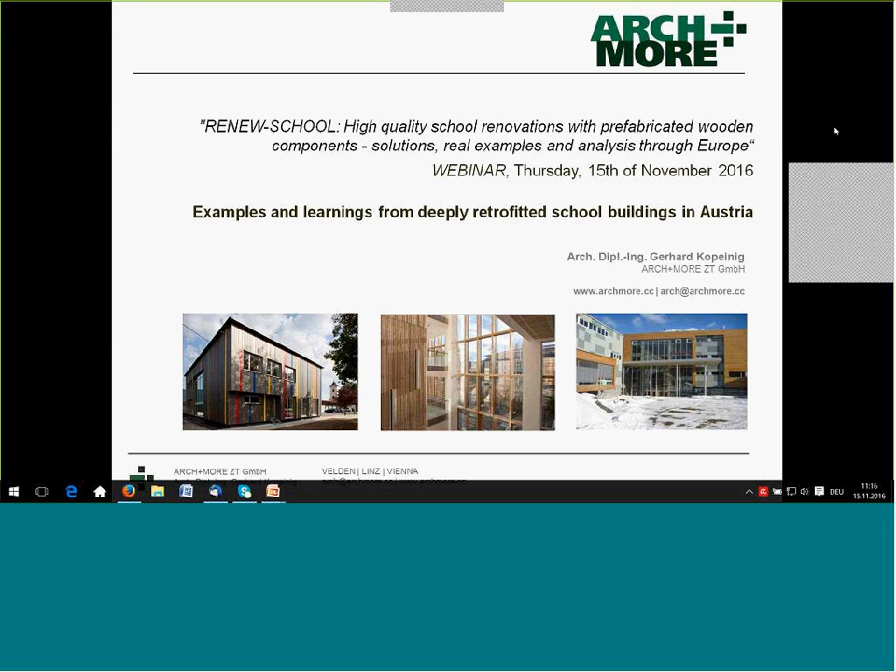I'm an architect. I'm doing retrofit buildings since more than 10 years. We started in 2003, 2004 with the first prefabricated elements in housing situations, and the first school building we did in 2008. We are not only an architecture office, we are also doing energy concepts. So overall thinking is for us more than important.

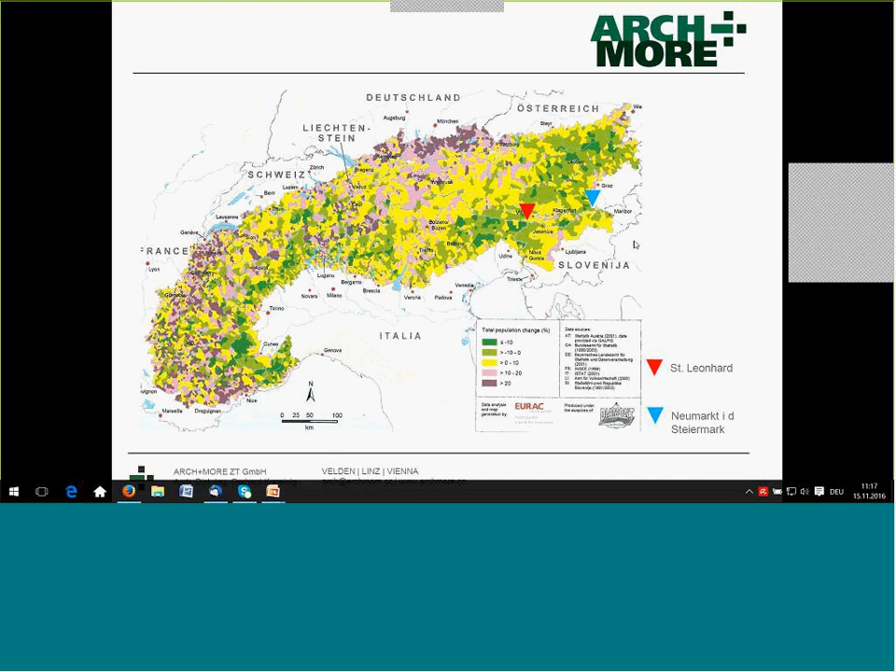You can see where we are situated. I would like to show you mainly two front runner projects, one in Neumarkt in Styria, one in St. Leonhard in Carinthia. You can see that we are in the Eastern Alps, southern Eastern Alps, on the border to Slovenia and Italy. You can see also the population and temperature situation.

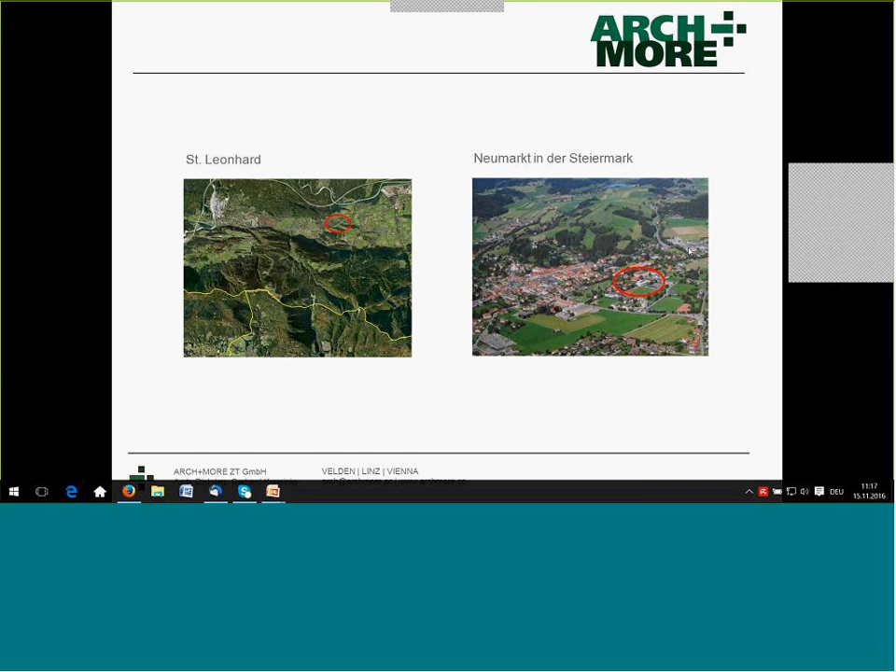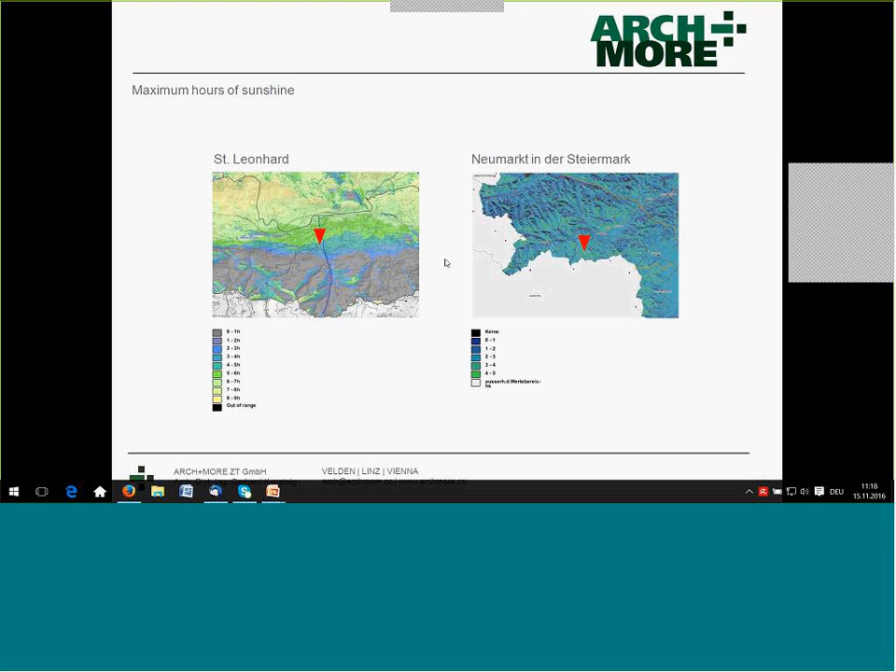You can see how the local situation is in Neumarkt and in St. Leonhard. These are very small villages. These are not very big cities. You can also see the sunlight, the maximum hours of sunlight in winter. In both situations, it's only 3 or 4 hours of possible sunlight in the winter situation. So we have a very cold climate.

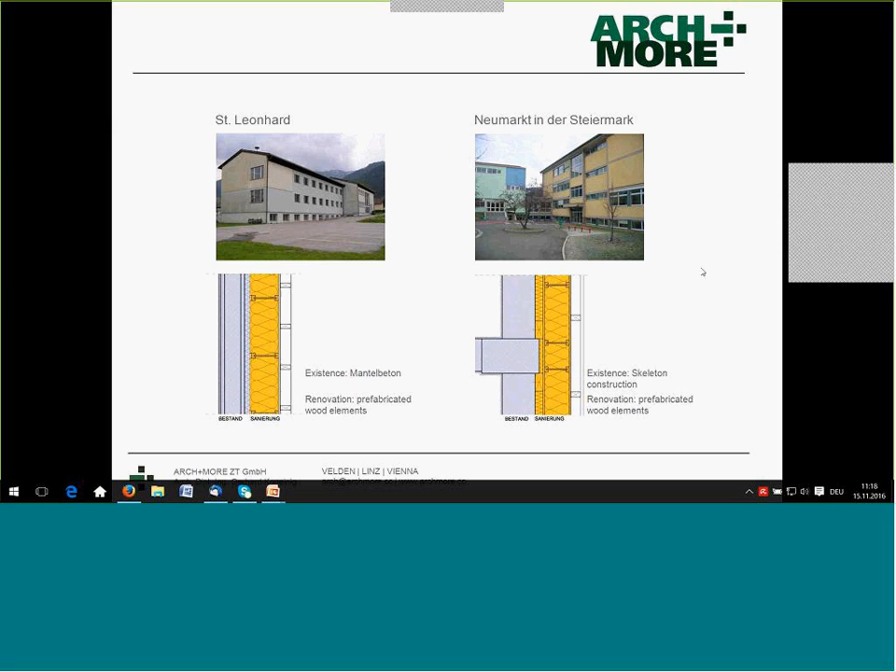So basically, I would like to compare the situation in Austria. We had in the late 1980s the first school renovations. As you can see on the left picture, there is 5 or 6 centimeters of EPS on the facade. That's where we started with renovation. And on the right hand side, you can see Neumarkt, a concrete structure filled up with bricks in the 1970s. Typical building stock in Austria.

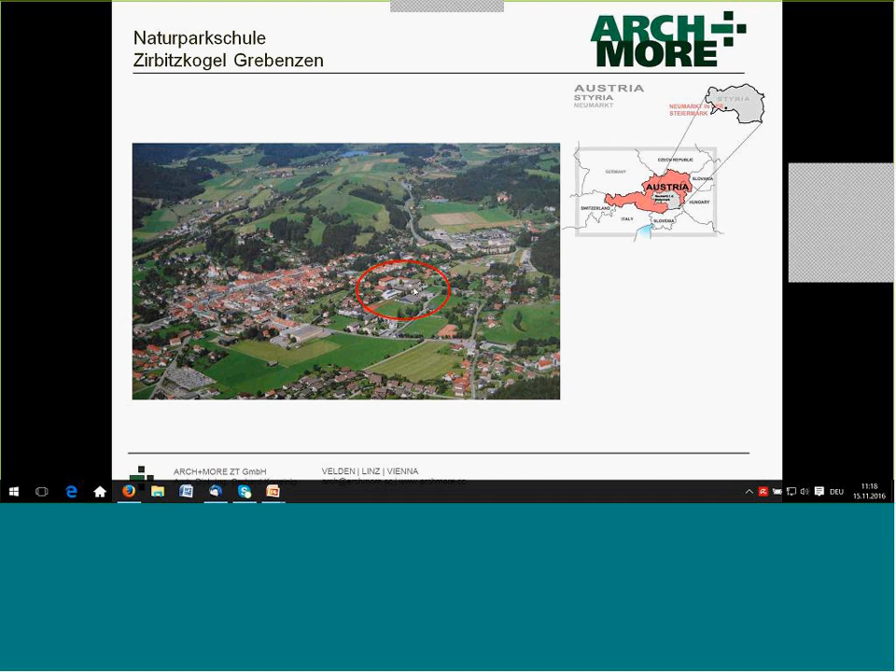First, we start with Neumarkt. As I said, it's in the countryside. Also here, the building stock consists of very different typologies. Basically, we are looking at the concrete structure filled up with bricks, because this is the point where we started with renewing and basically first analyzing.

What I want to mention first is, please, before you start with any concept, with any drawings, you have to analyze, you have to drill into the walls, you have to see what the structure is all about, especially these old roof structures. They are really to analyze in detail, and you have also to analyze the way of use of the school

building for the future, because, for example, in this case, the countryside is losing pupils, of course, so we have too many square meters, which we all have to heat up in the cold climate. So it's a big topic to reduce square meters in our school buildings. Of course, the local governments want to keep the square meters, don't want to reduce their building. The government wants to reduce.

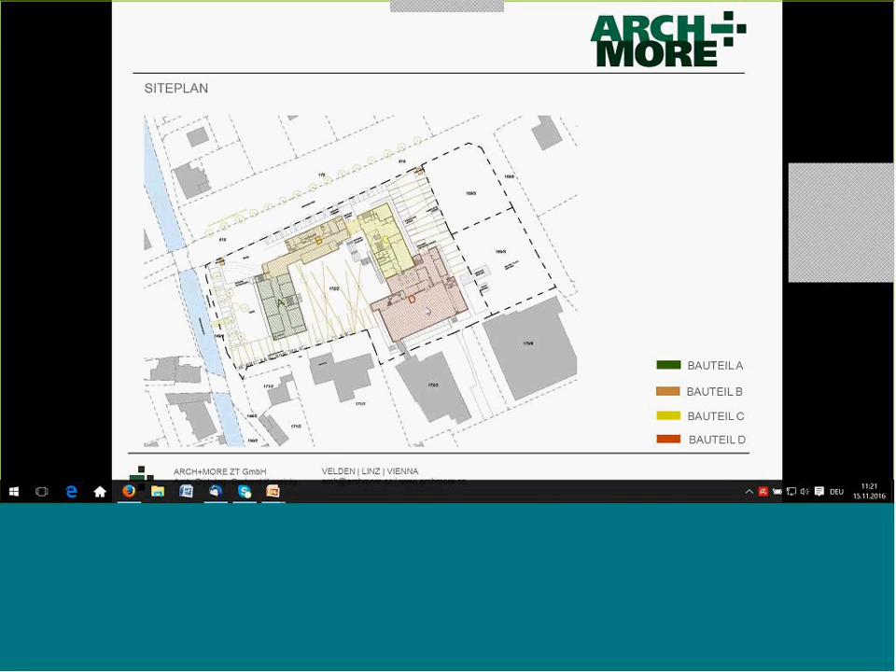Yes, so this is divided in 4 sectors. In this school, maybe we look at C and D, and this is what we renewed with wooden elements. Basically, whole sector C is renewed with wooden elements. Sector D is a sports hall. This is also a zero energy renovation, but in a conventional way.

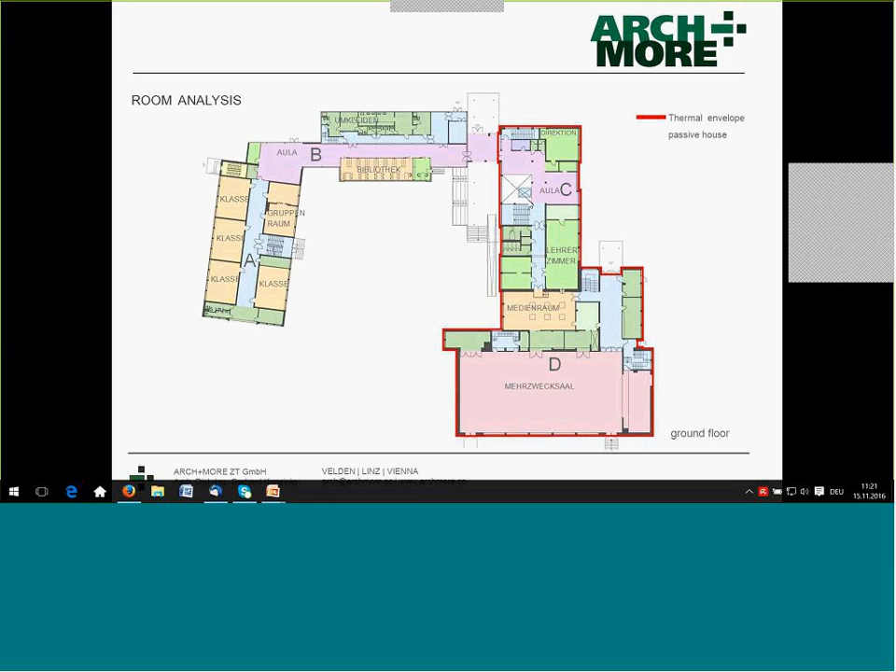As you can see, we got a new entrance. We got a new atrium in this building, and we got a new elevator for pedestrians to have a new space and a new way of coming into all levels. As you can see, one important thing is the detailing. The detailing before you start with building; you can see here the existing level of the building.

So only the construction we kept. You can see the yellow things are the existing points. The red line, the thin red line, is the airtight layer, the inside airtight layer, which is very important if you have a ventilation system, an HVAC system. And as you can see, there is the orange line. This is the very important line for the isolation, so that we don't have any thermal bridges in our detail.

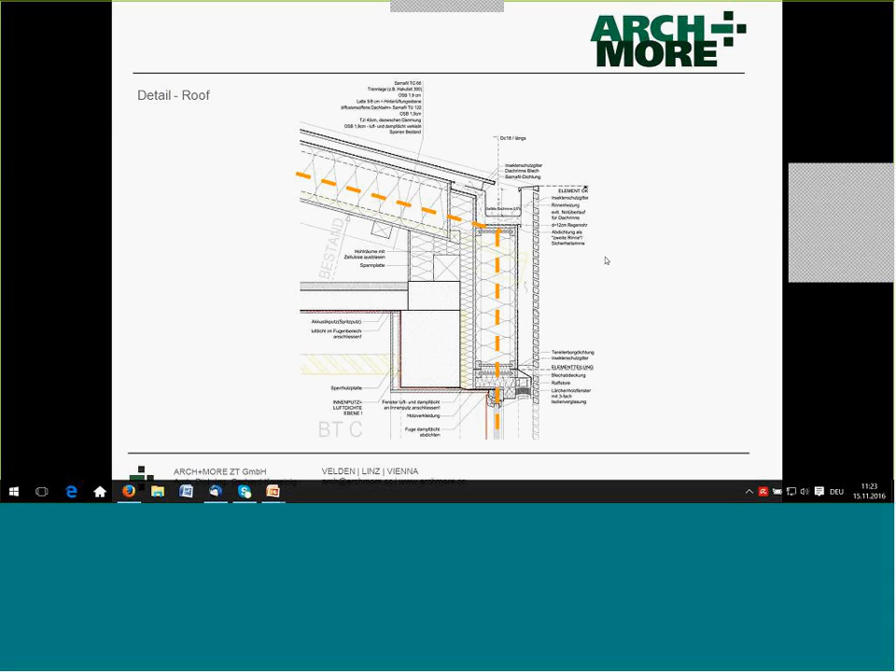And of course, we have an air ventilation on the outside, on the suspended construction. And of course, we would like to have very nice details as an architect. So also this is all in these system details, which is very important to draw before you start searching for a contractor or anything in case of construction.

So you can see our design, the existing building and the design. You can see this is a Western orientated open atrium with a glass wall. Here you can also see that we had on one hand a look on the daylight quality of the interior space. On the other hand, we have to make sure that we don't have overheating, because it's Western orientated.

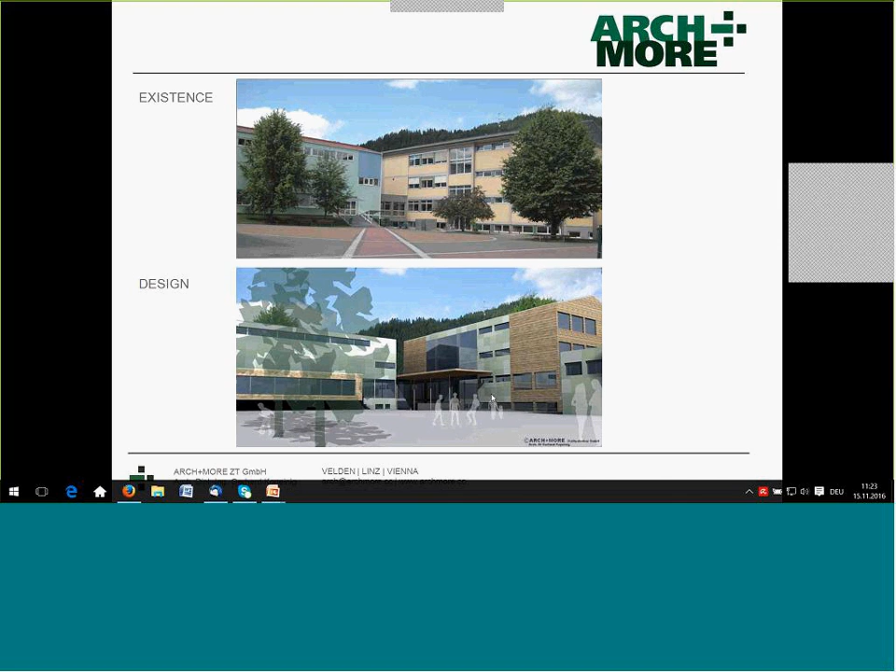Option 2, an outside sunscreen, of course, would be the best. We are always underneath the 26-degree line, but we have the problem also of maintaining and the investment costs, and not so much transparency as we have now.

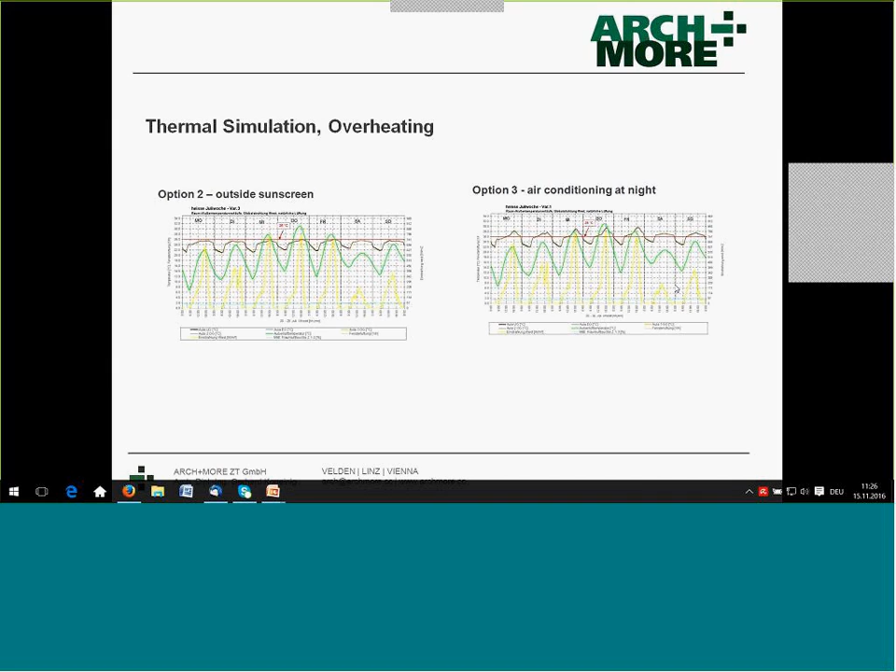Now, then we started with the construction. Actually, we did the construction in 2 summers. First summer we did the sporting hall and the connection area. Second year we did the classroom part of the school. So we had 2 times 10 weeks, and as Mark and Armin already said, we had also some preparation time in May and June. This helped us to have no container classes, which are also costs for the government.

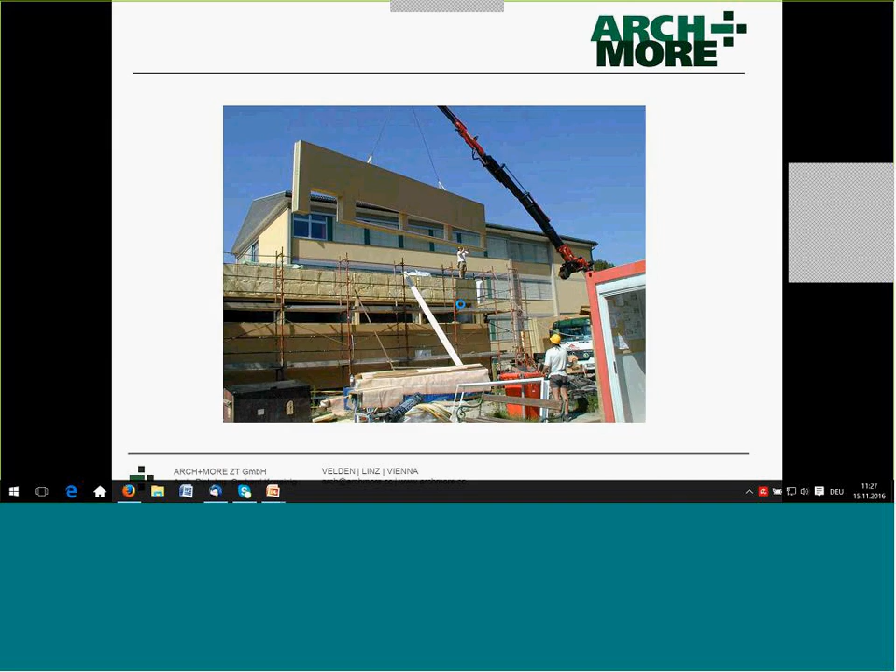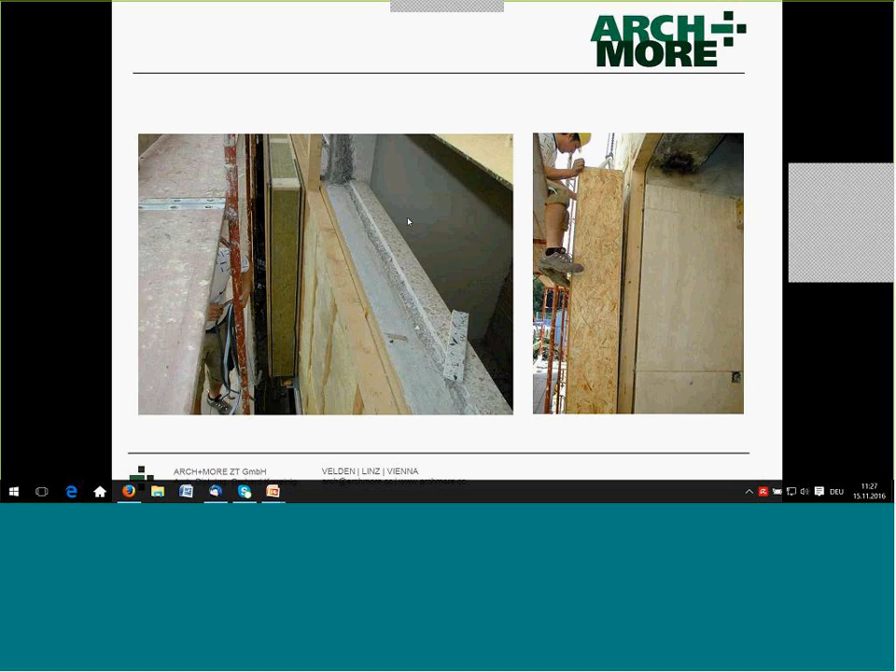Here you can see we have a pre-construction. We have the wooden elements, as he is sitting there bringing in these elements in position. The main thing is the connection of the new element of the OSB board to the existing plaster wall and the inside, because this gives you the airtightness. This is the main task if you work with this wooden element. You can see here on the right picture now how this work has to be done.

These joints are the most critical things apart from the electrical installation. For example, the sunshades, which is also a very critical part in case of airtightness. Here you can see the depth, how deep it is to the wooden windows.

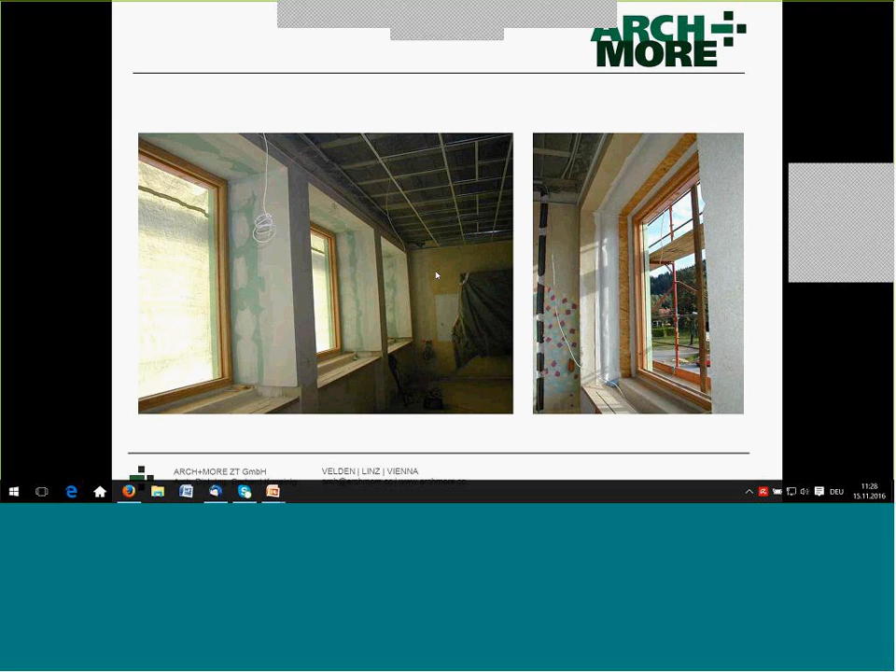We went for larch, which is very local wood there. We had this question before, the daylight, but we simulated this daylight situation, and the teachers are very happy now with having a very deep board for the pupils to bring their presents on top.

So it's very helpful. Here you can see the holes for the cellulose. We have blown in the cellulose on site where it was not possible because of the joints to do it in the workshop. Some parts always have to be done on site.

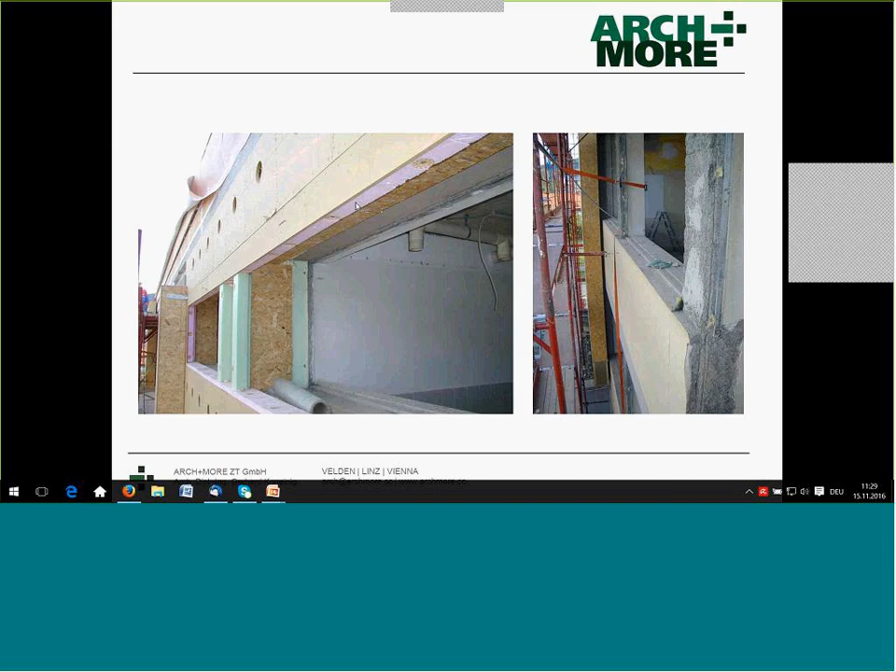Here you can see the element before we mounted it, and the worker next to it mounting it. Here you can see the steel plates, the consoles, which we needed for structural reasons. As mentioned before, the structural point in the construction is very tricky, especially in the existing situation. Therefore, you really have to analyze it perfectly and in detail with a good team.

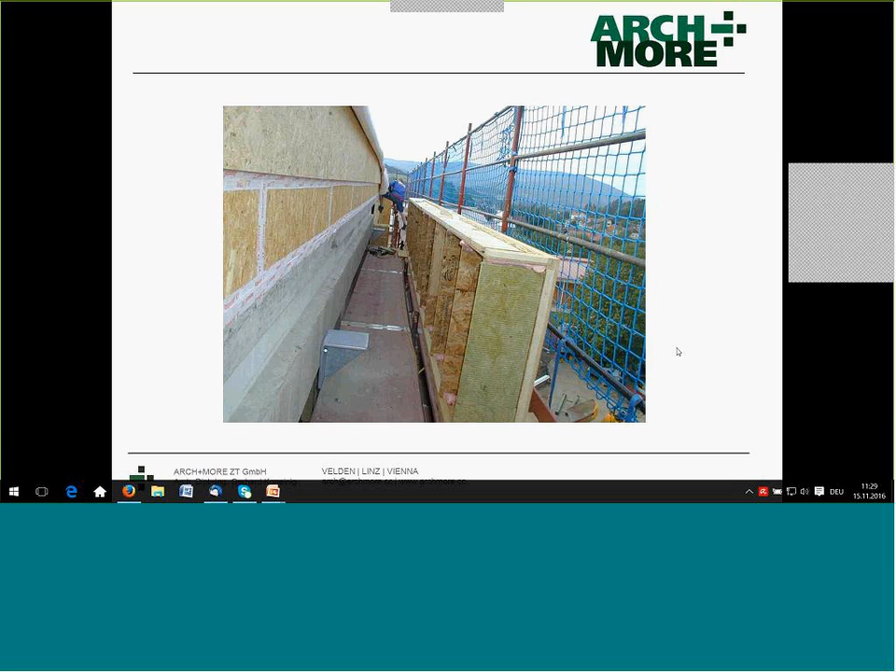Otherwise, it's not. You can see how it looks like on site when the elements are mounted, and you can see the holes where we have blown in all the cellulose.

Here you can see the wind paper. It's not like an airtight paper, because otherwise you have condensation in the construction. It has to be only windproof. This is the reason that the insulation becomes higher quality and has a higher effect on the facade.

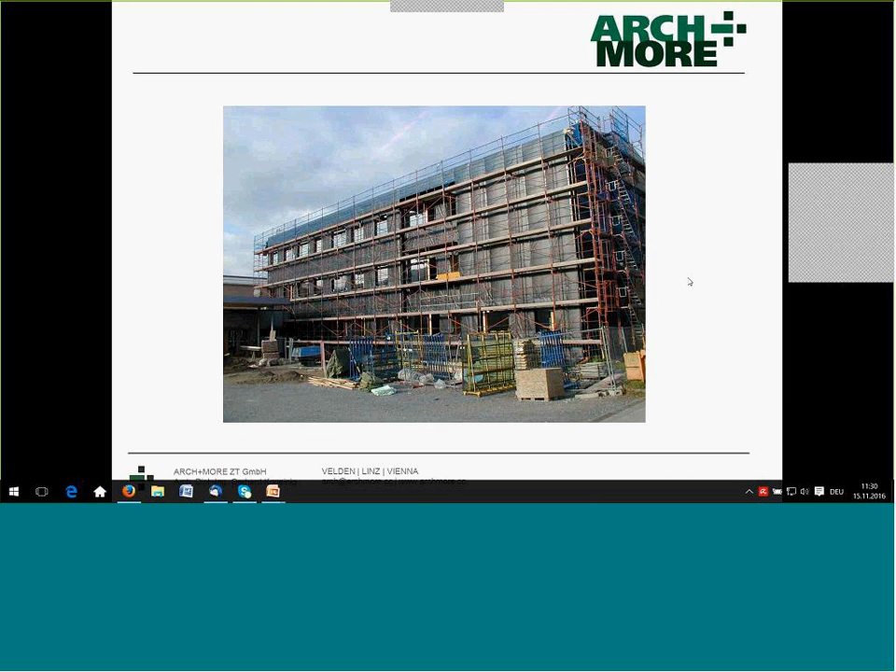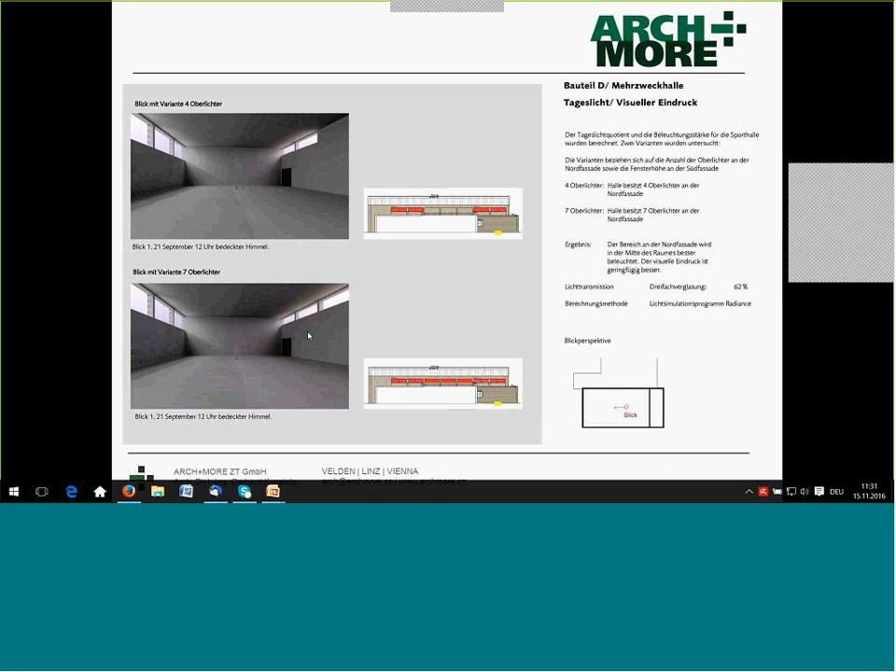So we had to halve the north side windows. We didn't want to do this without a daylight simulation, because we didn't want to have the argument afterwards that we have less daylight in the sporting hall. So we did it in very different versions, 4 or 7 versions of daylight simulation, to show the client how the situation will be after renovation, and it's perfect. So we decided to make the north side windows half the size.

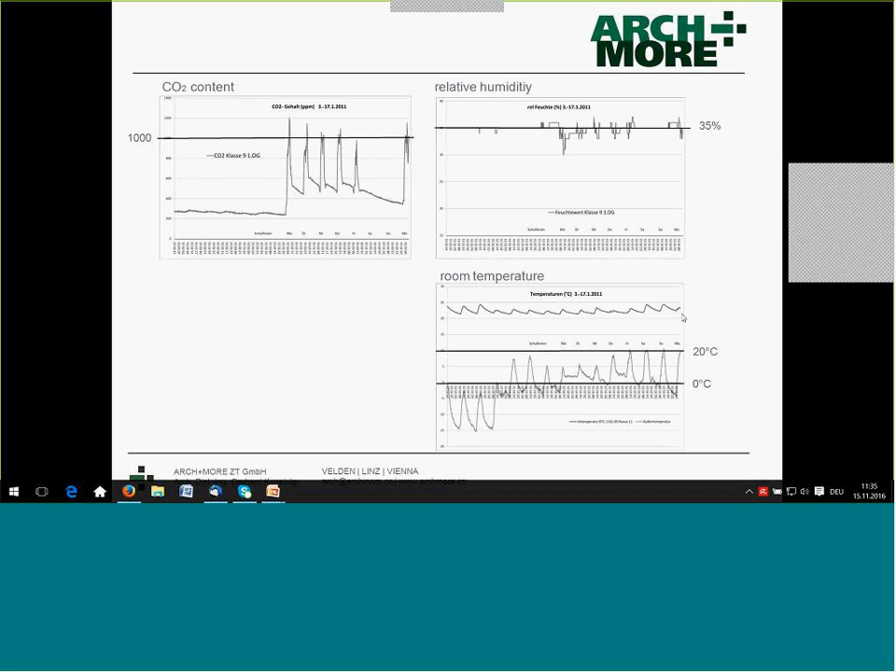You all know that the passive house standard is 15 kilowatt hours per square meter and year. So we have a real passive house renovation with wooden elements, in this case also a measured renovation, which is quite important.

So this is really nothing. All in all, we need per year 13,000 kilowatt hours for the whole ventilation system of the classrooms. These are 13 classrooms, so it's really a huge building, and we don't have a lot of demand.

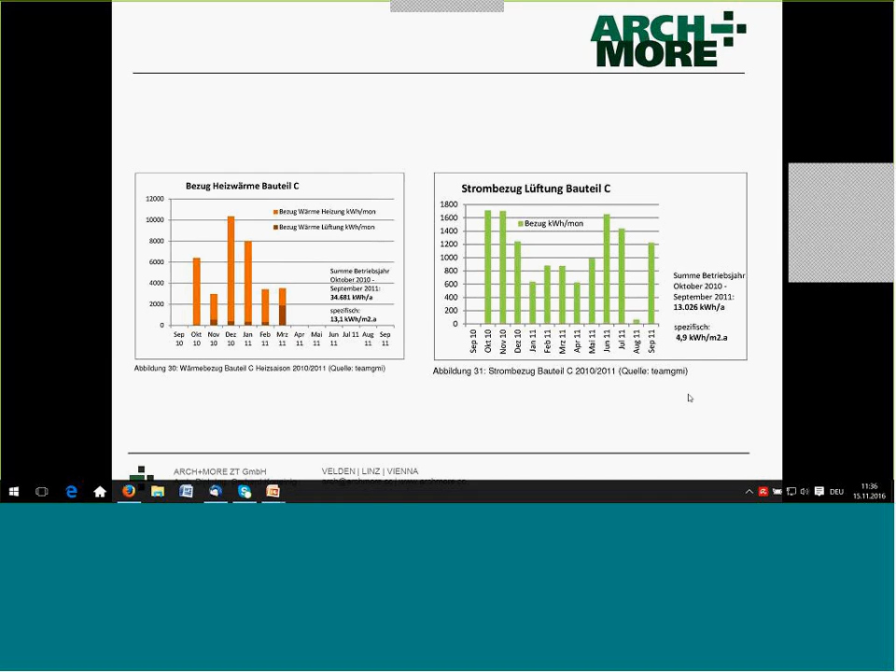We are doing around 2 school renovations like this per year, so we really use this monitoring information. I can really suggest that monitoring is very important for your buildings.

Underneath the ground there is preheating of the air intake. So we have the air intake up there, and we have preheating with earth heat for the air before it comes inside the classroom. So we really use natural energy in this project.